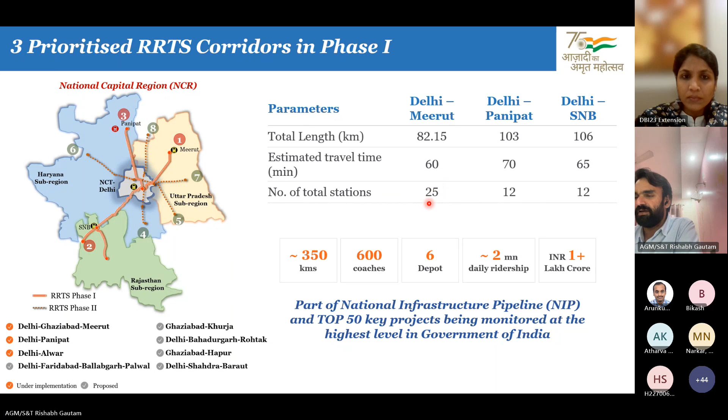The key differentiating factor of RRTS versus the metro system is that while a typical metro like Delhi Metro is designed for 80 to 90 kmph, the average speed including stoppages is approximately 35 kmph. Our RRTS system is designed for 180 kmph, with an operational speed of 160 kmph, giving us an average end-to-end speed greater than 100 kmph. This is what differentiates us.

While traveling in a metro from central Delhi to Gurgaon or central Delhi to Noida, you would spend approximately 40 to 50 minutes on that journey. In the same amount of time, you'll be able to travel from Delhi to Meerut, Delhi to Alwar, or Delhi to Panipat because of the higher speed.

Apart from that, our signaling system is interoperable, which means that the same train can run from the Delhi Meerut corridor and can also run on the Delhi SNB corridor and the Delhi Alwar corridor.

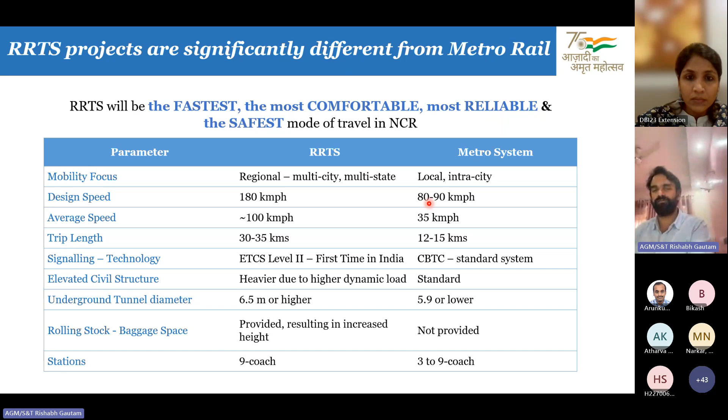But this is just a very generic overview of the RRTS project. I'll just directly dive into what we did in terms of BIM implementation.

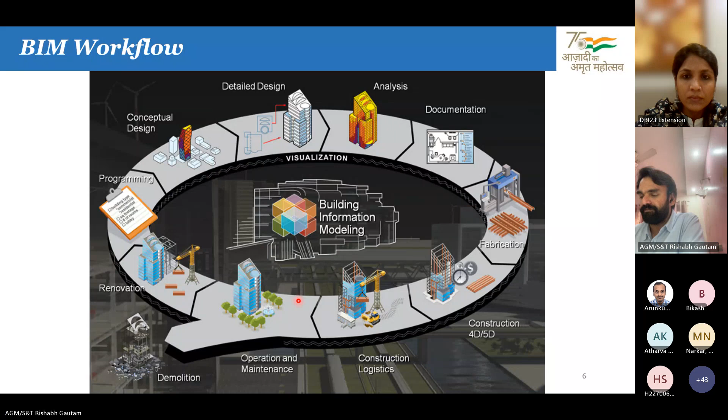So what do we mean when we say BIM implementation in NCRTC? BIM, as everyone knows, is not a dumb 3D model. It's a 3D model which has embedded metadata information in it. It's a shared information model.

In NCRTC, from the very beginning - I joined NCRTC in 2017, the company was formulated in 2016 - right from the very inception, we were very clear that we wanted to adopt BIM processes from the very beginning, and we identified what areas of BIM we wanted to focus upon.

There are various dimensions of BIM. I've not talked about those, but you have 3D, 4D, 5D, up to 7D. I'm very proud to say that we have implemented all 7 dimensions of BIM in NCRTC. So we identified what are the key aspects of BIM we want to focus on.

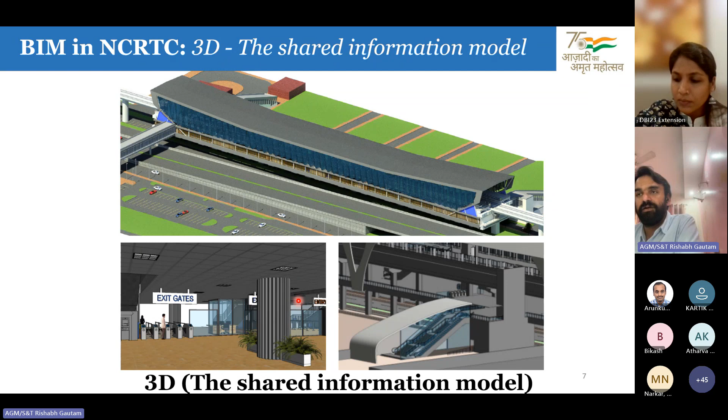I'll give you a very brief glimpse of what we have achieved and then talk about how we achieved it. So we already have all elements, including civil and systems, modeled as smart, intelligent 3D models. We have also implemented 4D BIM in NCRTC.

And that too, first we were using an industry tool called Synchro. Now we have developed this technology within our common data environment itself, so now we can visualize 4D simulations within the browser itself.

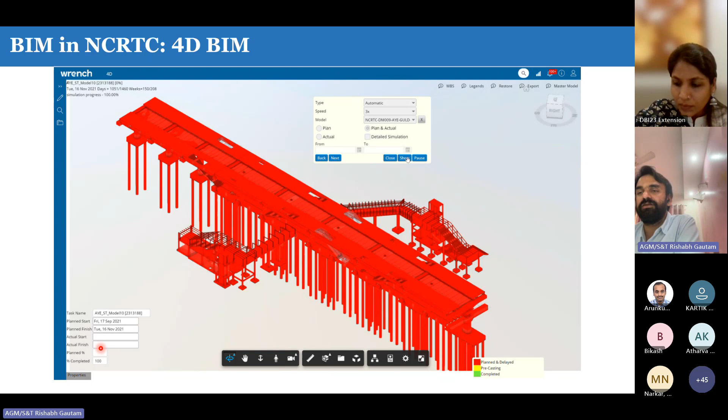So just a small video. Sorry.

So you can see, what we did was we linked all the Primavera schedules that were supplied by our contractors with a 3D model, as we are all aware of how 4D BIM works. And now we are able to visualize the construction sequence, how it would take place.

Now, typically how 4D BIM helps us is in a typical Primavera schedule when it is submitted, it is very difficult to find out what the problems are, if there are any inaccuracies. But when it is represented as a 3D model, when it's linked with all the 3D models, we can actually visualize the construction sequence and identify faults very easily.

So if somebody is casting a slab well before the columns are erected, we'll be able to visually identify it and tell them. So from a very layman perspective, people who do not have much experience with using Primavera will be able to visualize what construction sequencing has been submitted and whether it is as per our target dates and key dates given to the contractor.

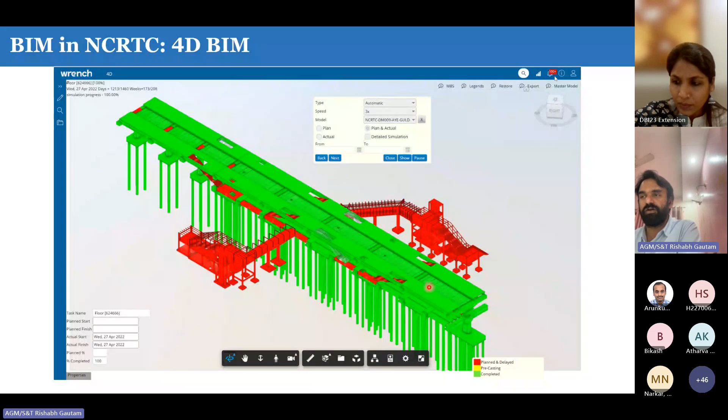We have also implemented 5D BIM in NCRTC, wherein we are able to do quantity takeoffs and derive costs right from the BIM model in the project.

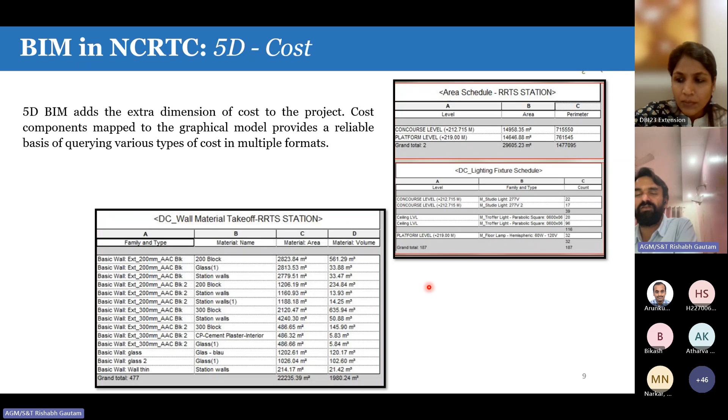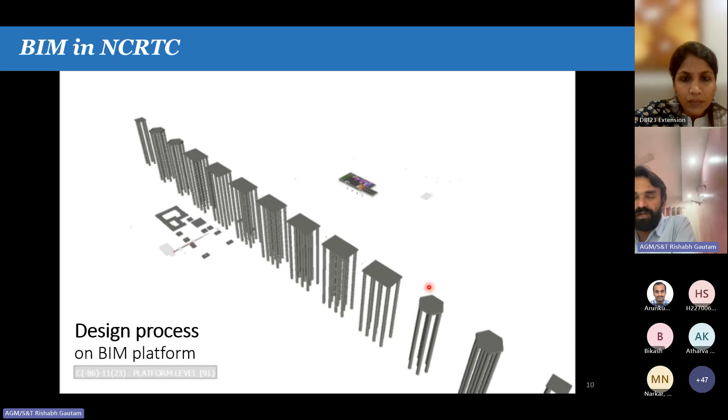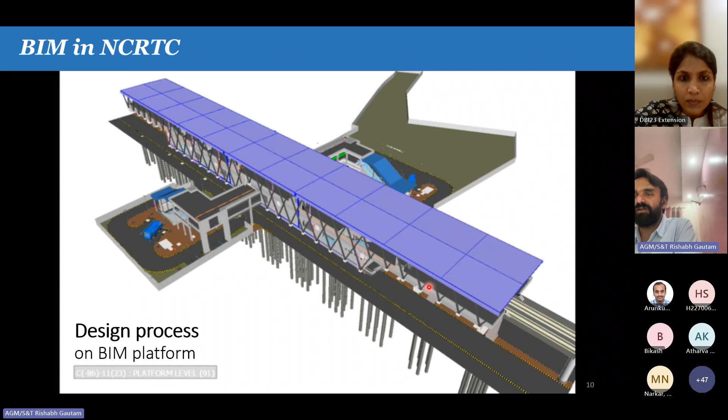Another key advantage of being early adopters of BIM in NCRTC was, when the project was initially launched in 2019, soon after that in 2020 March, COVID struck the world, and everyone was actually confined to their homes. But since NCRTC was on the BIM platform and we had a very robust common data environment, we were able to work from home. Majority of our teams were able to work from home.

Only the very essential people were required at site. The rest were working from home on the cloud, and we were able to approve all designs in time. So we can say that the impact of COVID on this project was very negligible.

So what you see here is our Sahibabad station, which was completely designed and approved during the COVID period, even before the construction began.

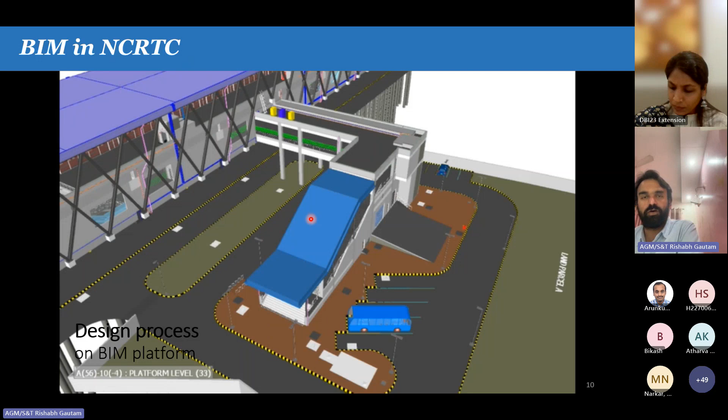And because of this level of detailing that we were able to do and its integration with our GIS platform, we were able to accurately identify which utilities needed to be shifted, electrical utilities or gas utilities. So we were able to align our tasks more accurately. We were able to optimize our costs in a more appropriate way because of adopting BIM processes from the very beginning of the project.

Right from the inception stage, we were clear that we wanted to adopt BIM processes, which meant there would be no 2D drafting in our project. From the concept design stage, every station, every drawing is a 3D model, and all drawings are extracted from the BIM model and issued to the contractor for execution. From the very basic concept notes to the good for construction drawings, everything is extracted automatically from our BIM models in NCRTC.

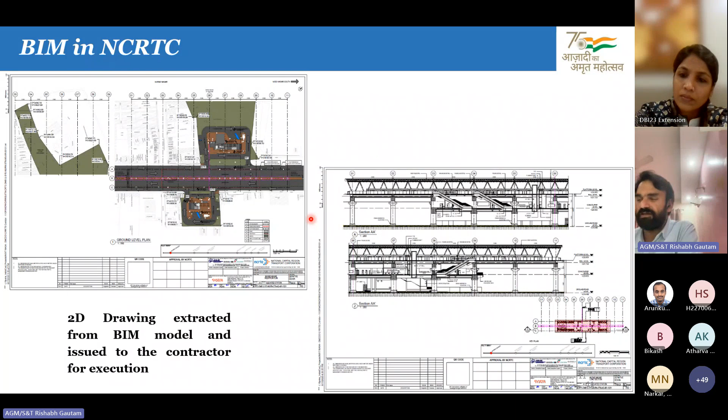This slide shows the GFC extraction. All the scheduled quantities are also extracted automatically from the BIM model. This is how we typically submit our drawings - a cross section, a 3D view, a long section, cross sections, everything.

Since everything is available as a single source of truth on a common data environment, if there's any change in the drawing, it is automatically notified to all the designated stakeholders, and they're able to update their drawing database as well. Another unique feature we've implemented in NCRTC is a QR code at the bottom of every drawing.

What that enables is once the drawing is printed and people at site are working using that drawing, they can just scan the QR code and the app tells them if this is the latest version of the drawing they're working on or not. Hence we can avoid any discrepancies or problems at site later on. So people at site are always aware if there's a newer version available.

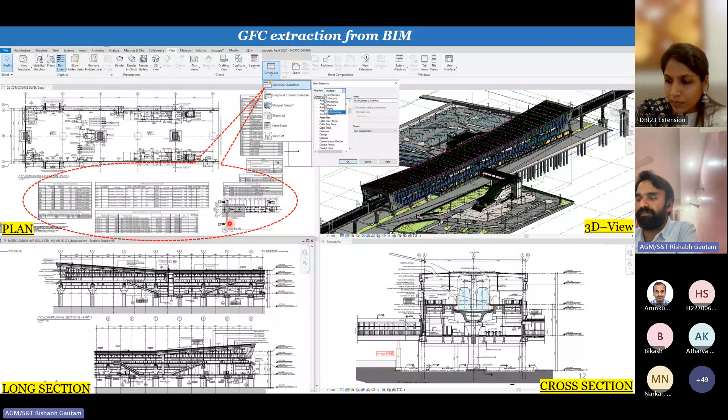Just another slide to show how bill of quantities are extracted from the BIM model.

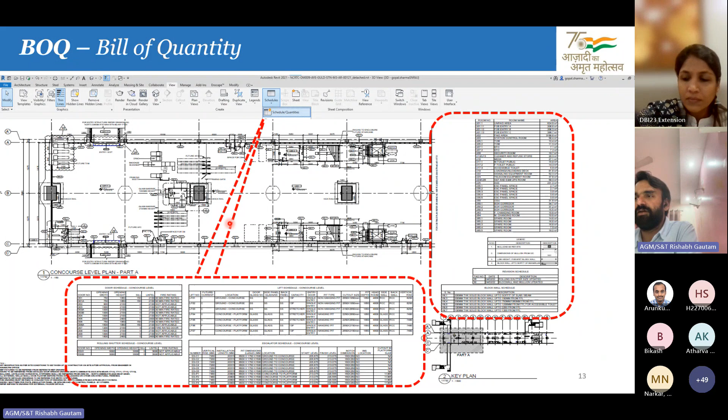Now, the tool used for BIM implementation is not important, but it is important to have uniformity across the project. So while we began this project, we identified a few software that we wanted all our contractors to work on. But we also mandated that all BIM models will be shared in IFC format as well, apart from the proprietary format.

All BIM models are also shared in IFC format, and our common data environment is able to read these IFC files, so that most people who just need to visualize these models and do commenting and annotation on them can do it without the use of those proprietary costly tools.

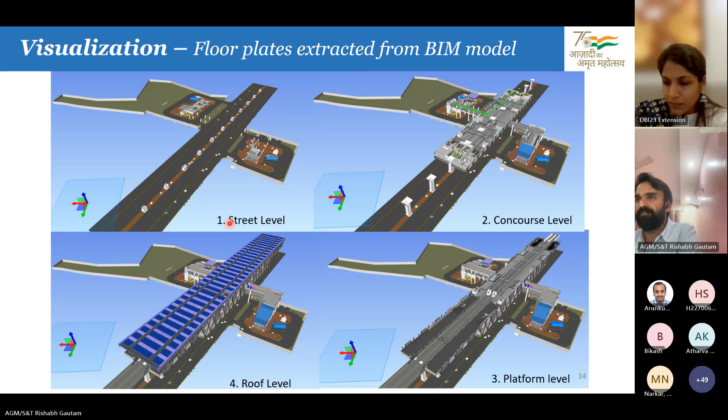Coordination of different services is very easy on BIM, and we were able to extract the advantages of that during the design phase before the actual construction began. We were able to identify a lot of clashes that could have happened at site and avoid them.

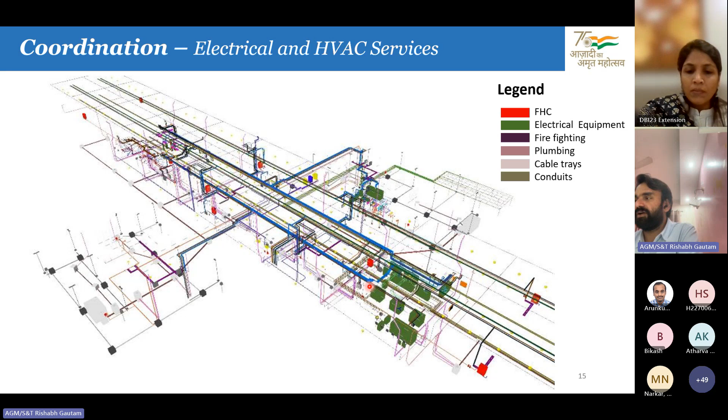This is the level of detailing we were able to achieve well before construction began. You can see every small minute detail - the track slab, the trains, the platform screen doors, the electrical booms, all lighting structures - everything was modeled in depth before the actual construction began.

All system contractors and designers were updating the same original source file, and they were able to coordinate remotely also to make these drawings successful and accurate before the construction began.

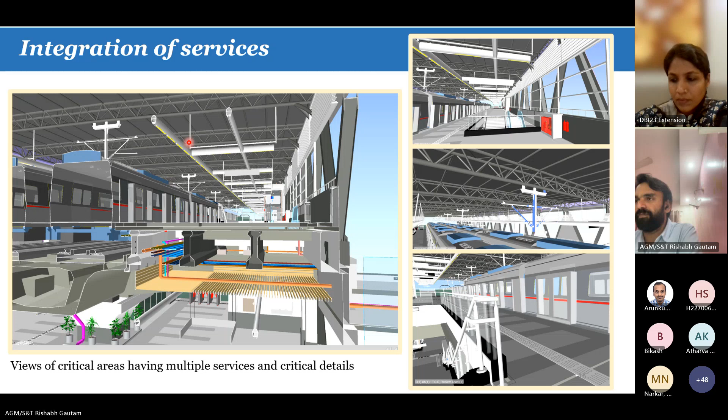This is an example of how we were able to identify a few clashes at site, how the cable trays were going into beams, how the track slab and the beam stacks were colliding. Just a few examples of these that we've tried to capture here.

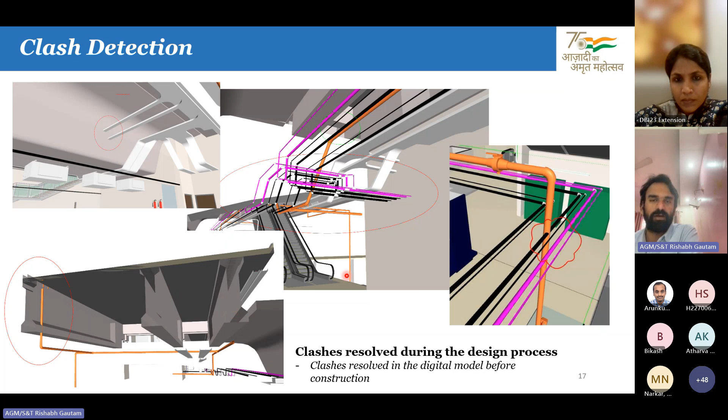Finally, I'm going to talk about asset management, which plays a very important role. What we like to tell time and time again during presentations is that specifically for NCRTC, this is approximately a $5 billion project. And the construction phase of the project is only a couple of years, from 4 to 6 years - that's the construction phase of the project.

BIM has a lot of advantages during the construction phase of the project. We can save a lot of time. We can also do a lot of cost savings during the construction phase using BIM processes. We can save on a lot of design changes which come on later.

But the majority of the rich information that we are able to capture during the construction phase of the project, we intended to use that for the asset maintenance phase as well. So the construction phase of the project is only for 4 to 6 years, but the asset has to be maintained for the next 50, 60 years. How do we utilize all that rich information that we have captured during the construction phase of the project during the asset maintenance? And that's what the seventh dimension of BIM focuses on.

That's the 7D. So early on in the project, we decided that all this information has to be transmitted to our AMS system, whatever AMS system we finally decide upon. And then we wanted to pass all this information, all this asset information, to our operator. Now the government has started pushing for private operators.

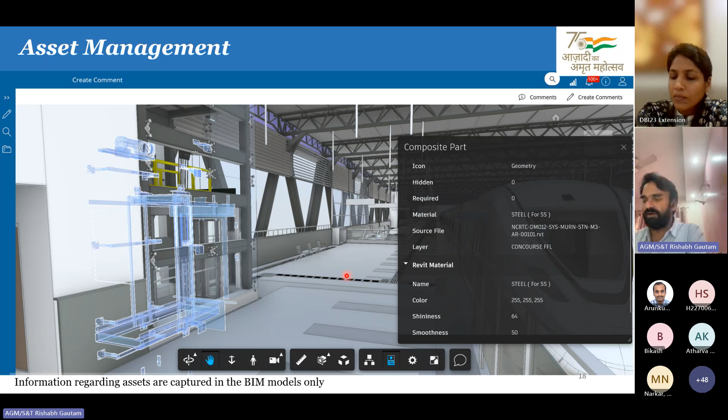If they are able to utilize IoT sensors and these digital twin models to accurately identify the faults in the system and help make the operator's life easier, that's a very small investment during the construction phase of the project, which gives huge benefits during the asset maintenance phase. So that's about the different dimensions of BIM and how we have implemented that in NCRTC.

So I wanted to give a brief overview of what we have already achieved, so that it becomes more relevant to understand. Yes, we are not just talking hypothetical here in NCRTC. We have already achieved a lot, and we are constantly evolving and learning from what we have implemented, but also how we intend to take it forward. So I'll just talk about the current status of BIM in NCRTC. As I've been saying throughout the presentation, we have already adopted BIM from the very beginning of the project.

Now, early on, back in 2018 and 19, a lot of DDCs and contractors came to us and said that we are aiming too high. The industry is not mature enough for this level of adoption. That what we expect out of BIM might lead to failure, and that the industry in 2018 or 19 is probably not ready. So we started analyzing different BIM implementations across India.

So we visited a couple of projects which were adopting BIM, and we learned from their mistakes. We saw what was good in those projects and probably what would not work best in NCRTC. And those learnings actually helped us understand this implementation of BIM works, and this format of implementation is probably not suitable for NCRTC.

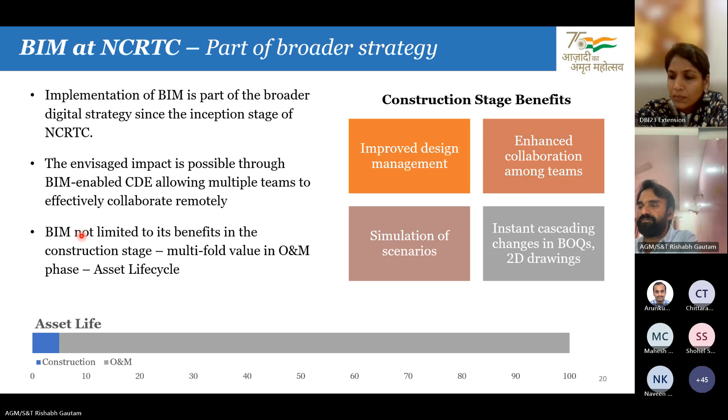So in order to make BIM implementation successful and to avoid the mistakes other projects were making, we understood that BIM has to be a company-wide initiative. There cannot be a specific team which focuses on BIM implementation in NCRTC. That way of implementation will only alienate and isolate those people, because most of the people will keep on avoiding responsibilities. So what we did was we identified BIM champions from each and every vertical in the organization.

And very early on in the project in 2018, we started training those BIM champions on BIM processes and BIM tools. And then it was the responsibility of these BIM champions within the organization to spread the message and knowledge of BIM in their respective teams. So we took a handful of people from track, from civil, from signaling, from electrical, from escalator, lifts, all departments.

We took people, we trained them on BIM, and it was their responsibility to get their teams working with them to also adopt BIM. That way, nobody was able to say that BIM is this person's responsibility or BIM is that department's responsibility. BIM is a common initiative across NCRTC, and we all take ownership of a successful BIM implementation in NCRTC. The second point for a successful BIM adoption was procuring a very robust and powerful common data environment and providing free access to everyone.

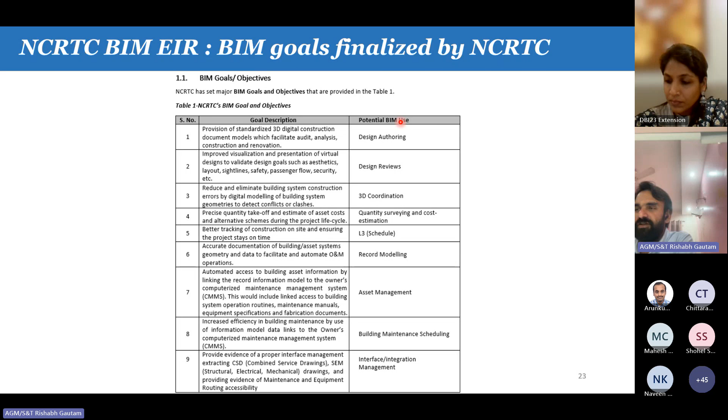This is a screenshot of our BIM goals and objectives that we captured in our EIR. So what I've talked in theory, I'm just showing you a snapshot of what it actually was. So what was the use, who was responsible for doing that activity? Everything was captured here. So everyone, when they read this document, they knew what they're supposed to do during the concept design stage, the preliminary design stage, right to handover and operations, what were the different objectives that needed to be achieved by a BIM model, what level of maturity they needed to take this model up to.

So by reading these documents, our DDC, detailed design consultants, were aware of what was expected out of them. Our contractors were aware of how they were supposed to update the model once it was handed over by the DDCs, and what level of maturity they needed to take it up to.

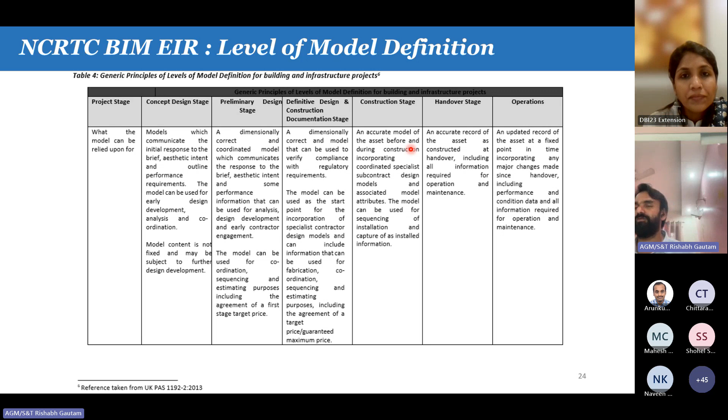Again, some other contract clauses like training, we made it very clear. Some of the contractors or consultants try to say, who will train these employees? The fact is, most of the Western countries, when they start implementing BIM projects, half the work is outsourced to India. So we made it very evident and clear: NCRTC is not responsible for providing training with regards to any BIM-based software application being used by the consultants or contractors for the supply chain. It's a requirement that the individual parties are fully trained on BIM tools prior to project commencement.

So we identified the excuses we expected these companies to make. So you have to think from our perspective. We are the clients. We are the infrastructure managers. It's our responsibility to make this project successful. And we had to identify potential roadblocks and nip them in the bud before they actually blossomed into a full-blown argument.

And then we also mandated that we'll be providing them a common data environment free of cost, but they have to mandatorily adopt our common data environment. They cannot say that I'm not comfortable working on this CDE, I will bring my own CDE. That was not allowed.

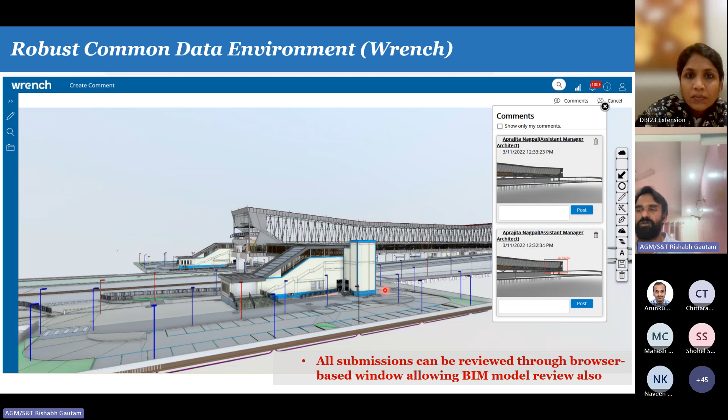So I think this is a small video. So yeah, this is a screenshot of the browser and how on the browser we are able to load a full 1.5 GB 3D model, browse through it, and navigate through it on the browser itself without using any of those costly, heavy authoring tools or a high-end workstation. I think that this is the video.

Yeah. So this is a typical workflow of how we use this browser-based common data environment, which in our case is Wrench, which is a Make in India software. And we have not accelerated this video at any stage. This is typically how the model, once you click on it, opens and loads, and how you are able to browse through it.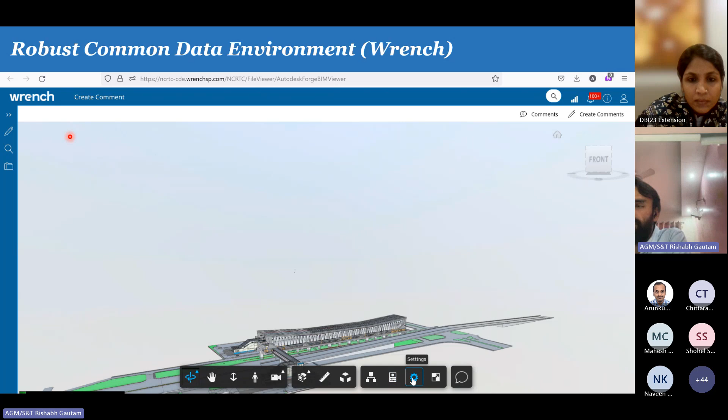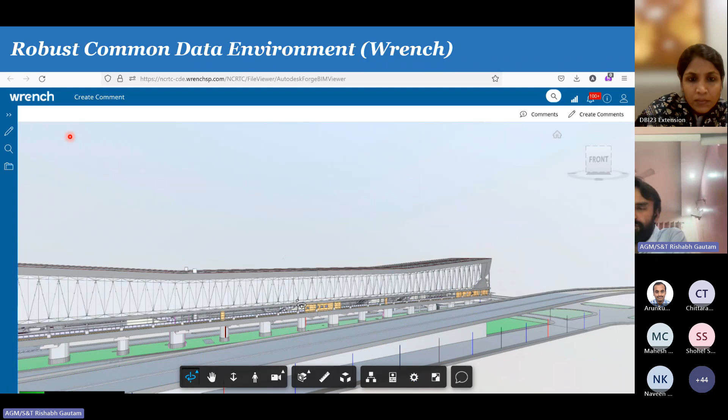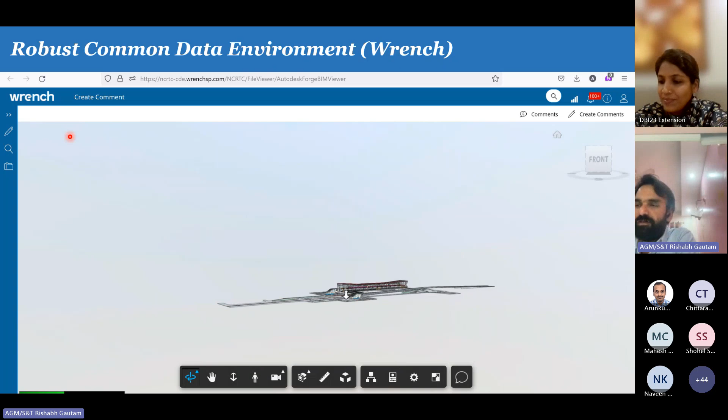So we are just giving you this small demo just to drive home this point that the technology is not a limiting factor right now. So if anyone says that the technology is not mature enough to do BIM implementation on a large infrastructure project of this scale, you can see it right now. It's all being done on a browser.

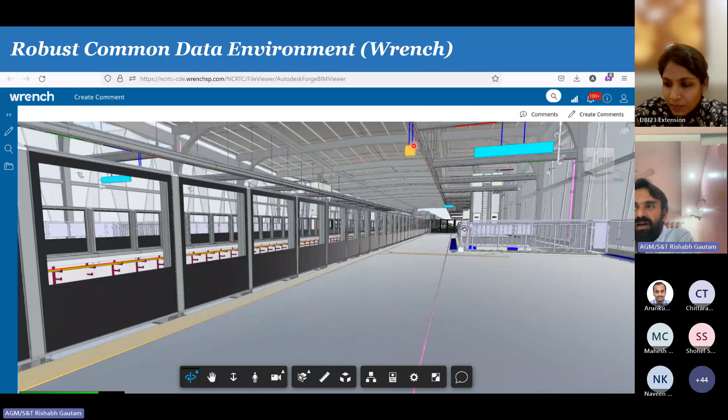And all system contractors, the platform screen doors are loaded, the CCTV cameras are loaded. Every element is loaded by individual contractors on the original file created by the DDC. So everyone is collaboratively working on the same 3D file and updating their part of it. Everyone takes care of their part. They coordinate the model together.

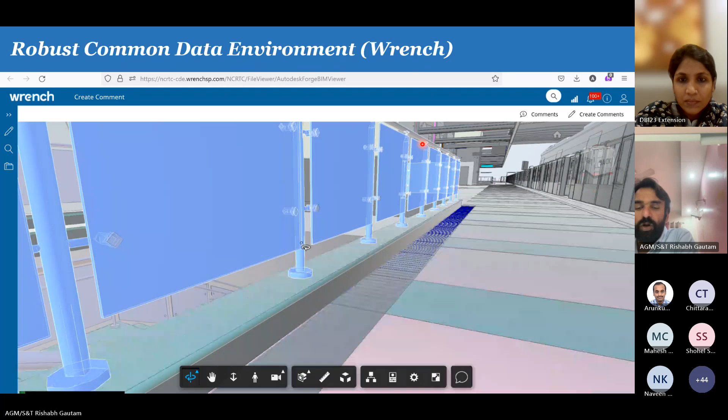If there are any problems, we have BIM model coordinators who assist people. So their job is only to help them identify if their team is running across the problem. We have a few people who are trained on that, but we do not take the ownership of aligning the two models or joining the two models or federating the BIM models together. We don't do that.

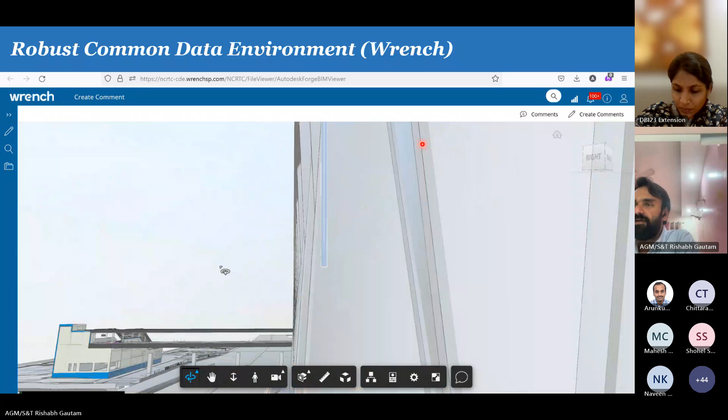So again, just to help you appreciate the level of detailing that went into the models and the level of maturity that we have achieved with the BIM models. I'll just skip this part now.

Another key factor for successful BIM implementation is the timely onboarding of the AMS and O&M contractor. See, when the operator is onboarded, he comes with his own set of understanding of this is the information which is vital to me. Right? This is information which I require. We, being a project team, probably have a different mindset, and you require the operator's mindset to understand. Probably I am passing on to him 50 parameters, right? But he required something different. His requirement of 25 parameters is not captured in the 50 parameters that I'm passing on to him.

So when he is onboarded on time, if he's onboarded before the ROD, he can actually tell the contractor team, the system contractors and the civil contractors, maybe modify your COBie file in certain format, maybe try and add all this information before you pass it on to me. And this was done and actually made our life easier, because since both were able to jointly agree upon the information exchange, we did not find any infighting that I am not getting sufficient information or sufficient information is not being passed on to me. So that really helps make this BIM implementation project successful.

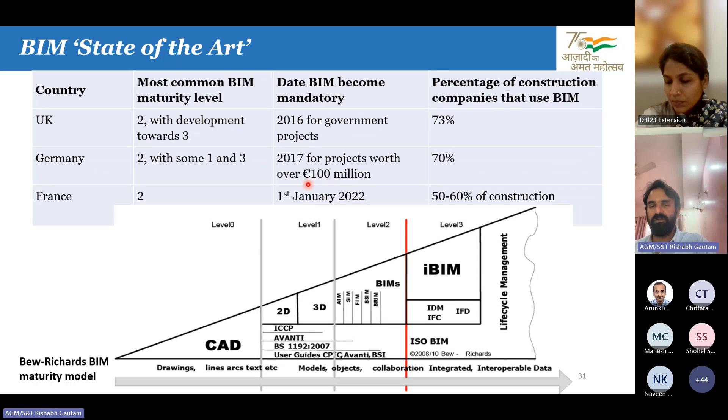Billions of dollars are being spent by the government, right? And there should be a central repository of all this data with the government or with a central agency so that they can take more informed decisions, that upper management or ministerial level management can actually take those informed decisions based on this kind of data.

Now, having talked about BIM implementation in NCRTC, I would like to shift focus from just BIM implementation and talk about something more advanced.

So since we were adopting BIM right from the inception stage, and everyone was providing us with all these rich 3D models and all this metadata along with it, we identified a couple of other avenues that we wanted to focus upon, namely augmented reality, virtual reality, and 3D printing. And we wanted to see how we can actually utilize these technologies for making our life easier during the construction phase of the project, as well as during the asset maintenance phase of the project.

Right. So if I start taking BIM as a baseline, what else can I achieve? What we feel is that the industry should not focus upon how BIM will be implemented, or if BIM implementation will be successful or not. We should take BIM for granted now. The industry is mature enough, provided we do the hard work at the right time, during the initial stage of the project. BIM can be made successful, and then what else can we achieve from the information that we have captured? So we created a pyramid, which is a center for excellence in NCRTC.

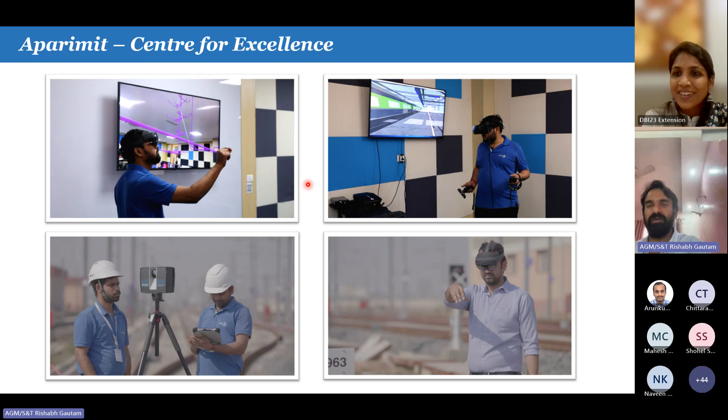And please let me know if I'm running over the time. I think it's already 10:55. I'll just quickly try and summarize all this. No problem, sir. You can take a few more minutes, sure.

Okay. So I'll just play this video. This is how we utilize augmented reality for on-site visualizations here. So we are wearing an augmented reality headset called HoloLens 2. This can be done on your phone or tablet as well. So this is our Sahibabad Guldar station during construction.

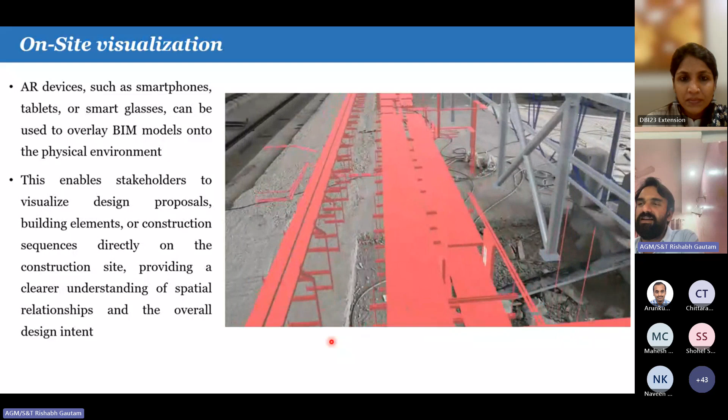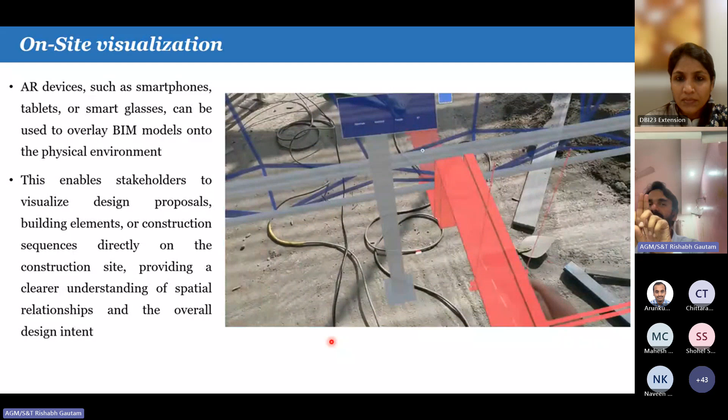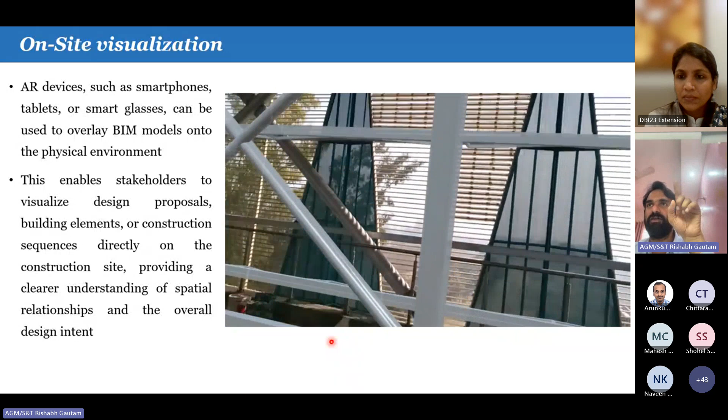Now we can actually load in information layer by layer and see if all this work is being done as per drawings or not. So I can use this for on-site visualization as well as checking if the work is as per my requirement or not. If the drawing mandated two cutouts, have two cutouts been provided or not? If there were three ACs to be provided in the room, just by visualizing, I can see these are the locations where three AC ducts were to be provided, but probably the contractor has just given me two. I can do on-site visualization and as-built validation.

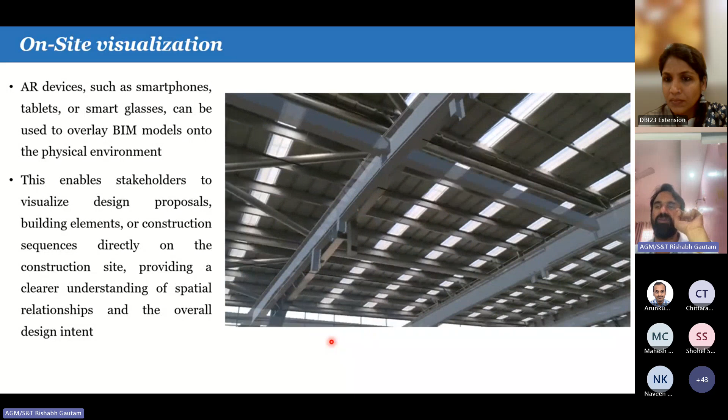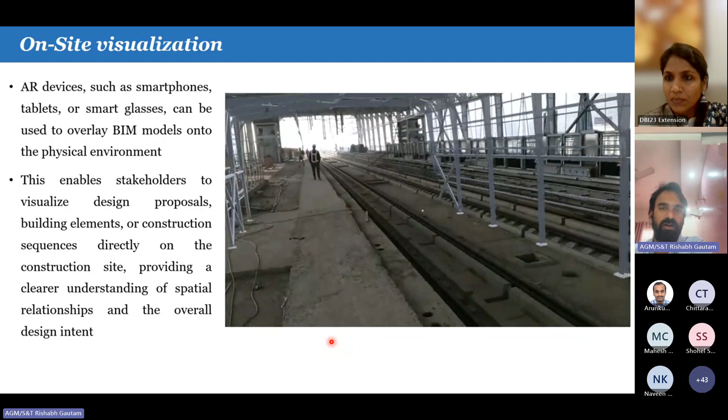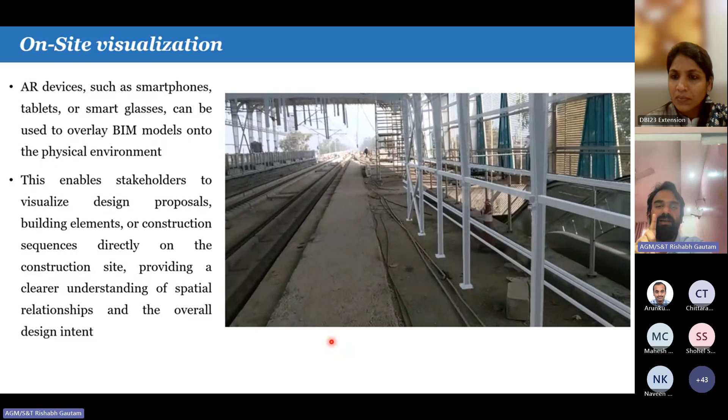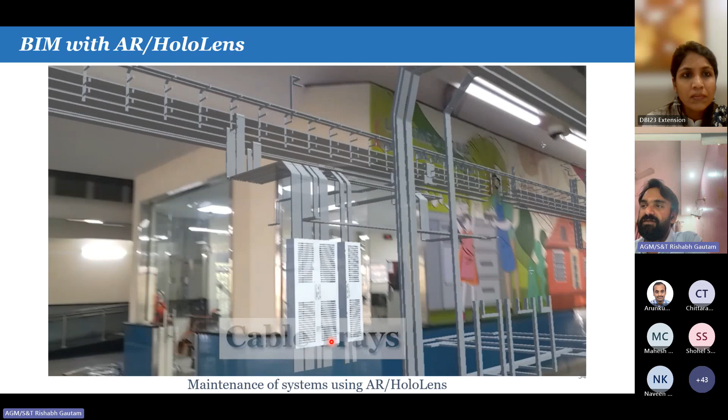So what you are visualizing here right now is how many columns are supposed to be erected, where the cable trays are supposed to be, where the cable runners are supposed to run. All that can be visualized and then cross-checked at site. So I can visualize things before they are constructed, and once they're constructed, I can visually verify if it is as per the drawing or not. As an example, once the platform was created and the station was ready, the contractor was supposed to give us 6 or 7 cable trays. I can now visualize if those cable trays have been provided or not.

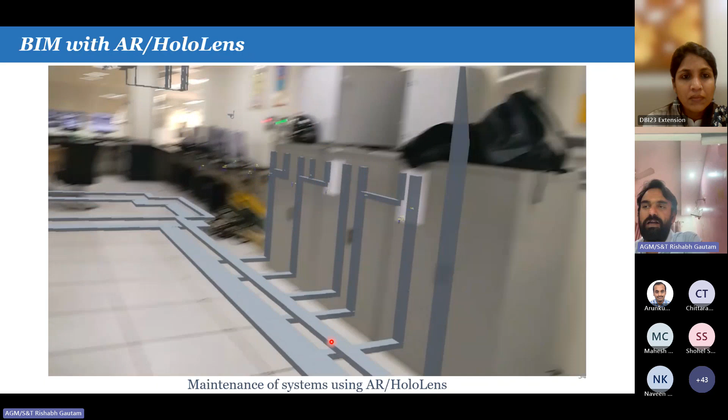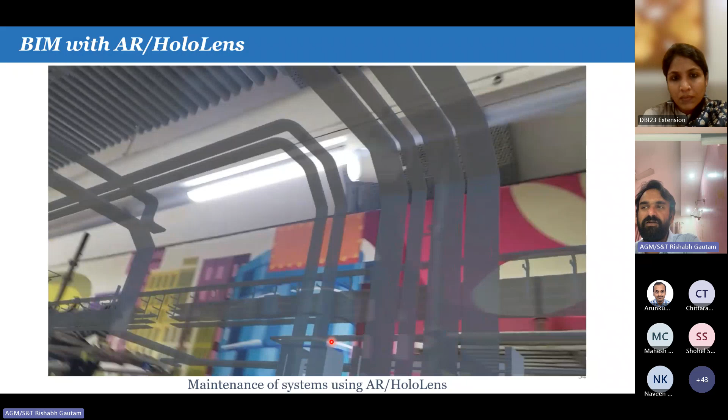Now I can actually visualize services which are hidden above the false ceiling or beneath the false floor as well. Now you can imagine how we can use this information for targeted maintenance instead of removing every tile to find where the cable tray was, or going through a manual 2D drawing. I can just wear a headset and identify where the cable trays are running. From these 10 cable trays, I can just say, show me the signaling cable tray, and follow it. So I can correctly identify the route.

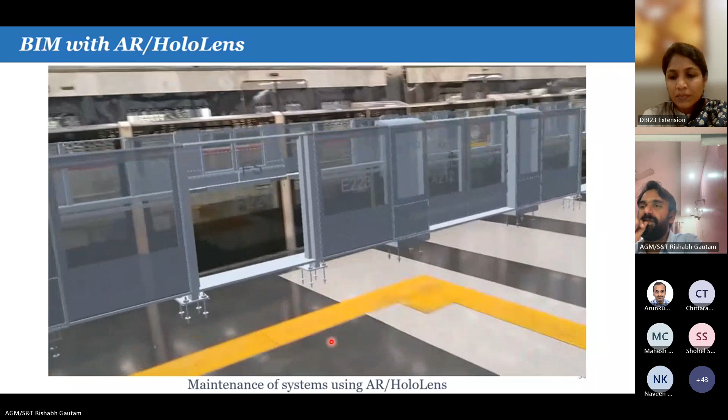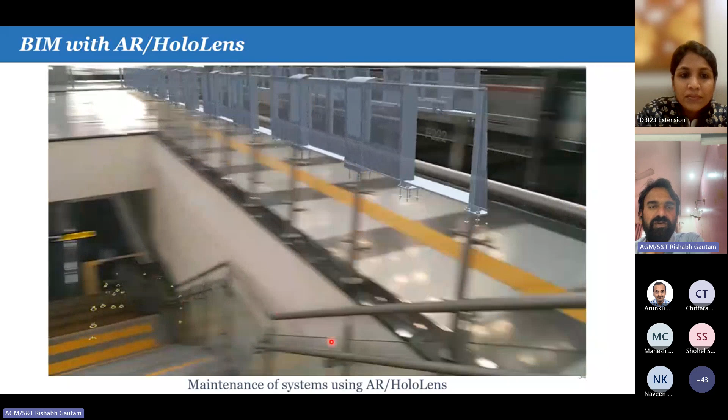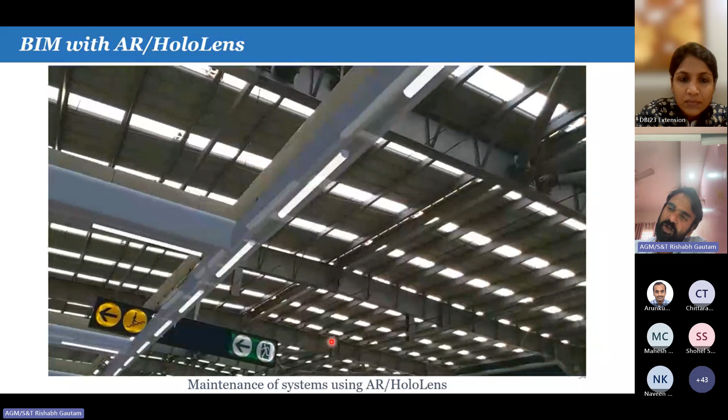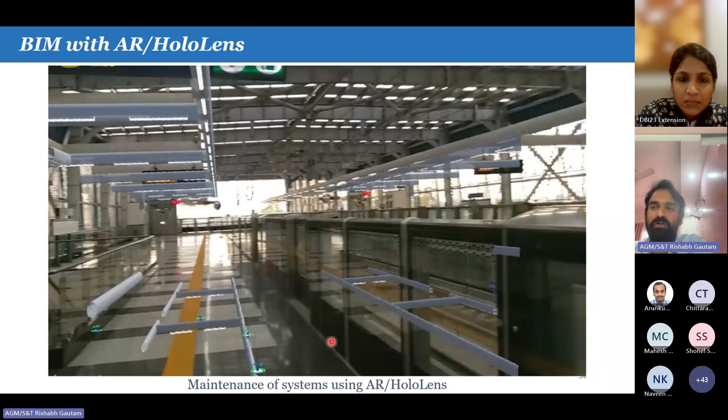This is the platform screen doors, and we can see if all the doors are correctly aligned as per the drawing or not. Just a very, very simple visual check. So these are different layers that we can just select. Now we are just checking lighting. You can see even the tube lights are aligned. And whatever little offset you see right now, it's a parallax error while recording from the headset. When the person is actually wearing the headset or using the phone, they don't see this inaccuracy, which is there in the recorded video due to the parallax error.

So again, I'll just skip. How do we use all this information from system contractors that we have captured for maintenance? So this is a small maintenance demo that we built for an IRS point machine.

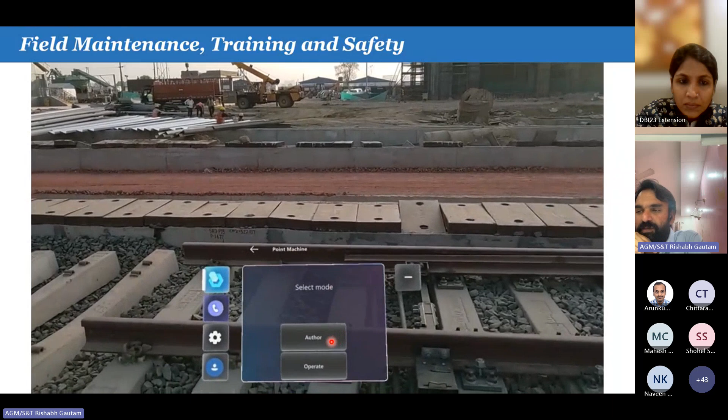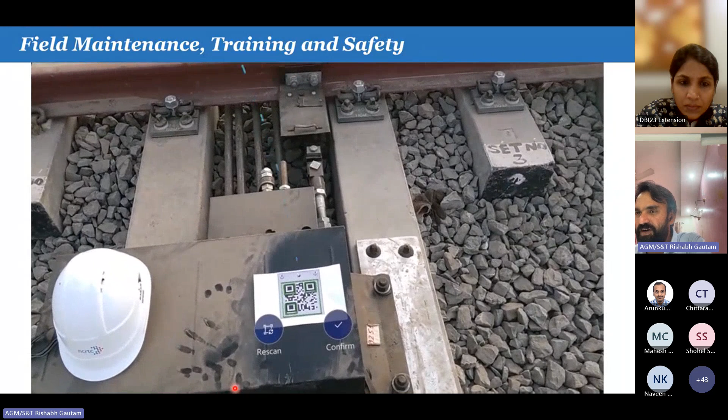And I'm just feeling the pinch here because I can't see that manual scroll button. Otherwise, I'll just forward it to the good portions of the video. Just give me 1 second. Yeah, I can see it now. This is the very important part that I like to show whenever we give this demo. Yeah.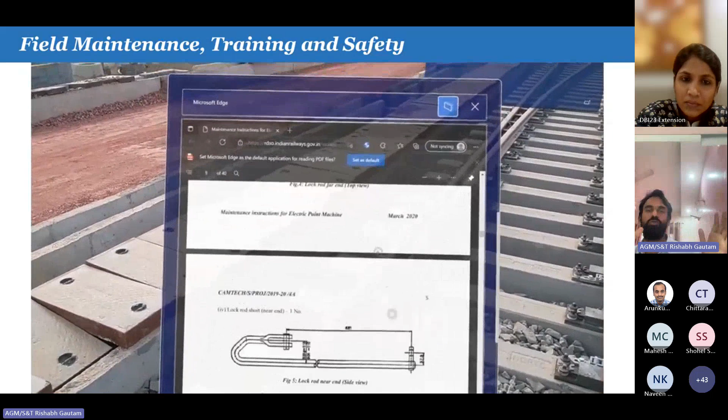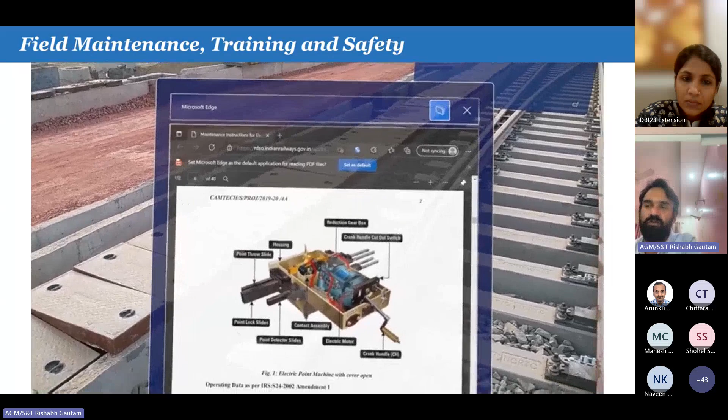Imagine doing maintenance. Since you have already captured all the asset maintenance manuals on the headset, we can download them by scanning the QR code to know which asset we're talking about. I can download its maintenance manual in real time while doing maintenance. Since all this information was captured in my BIM model and passed through COBie into my AMS system, now I can scan the QR code, get its information, and continue doing maintenance. If I forgot a few steps or the sequence I need to follow, these tools can enable it.

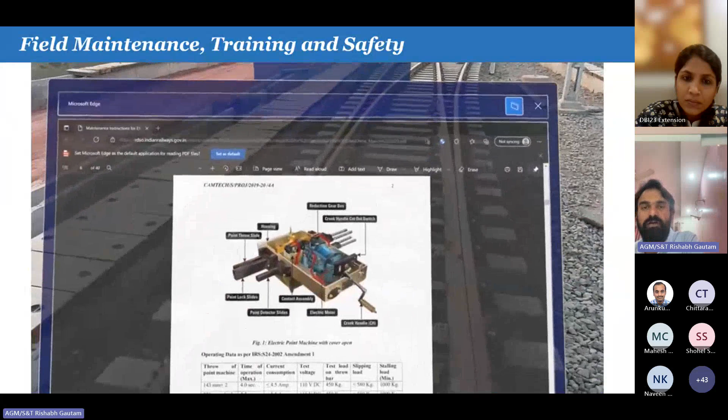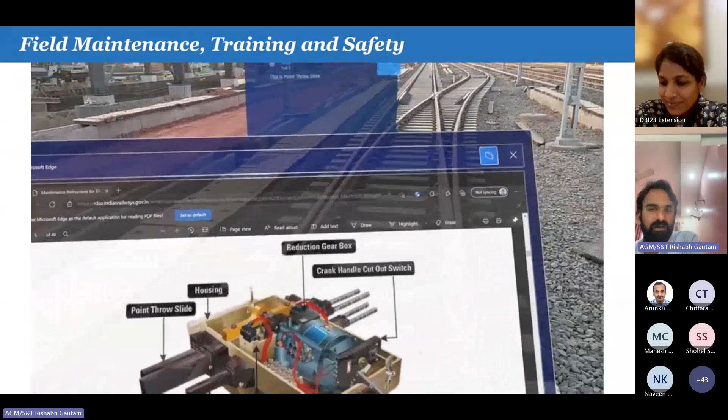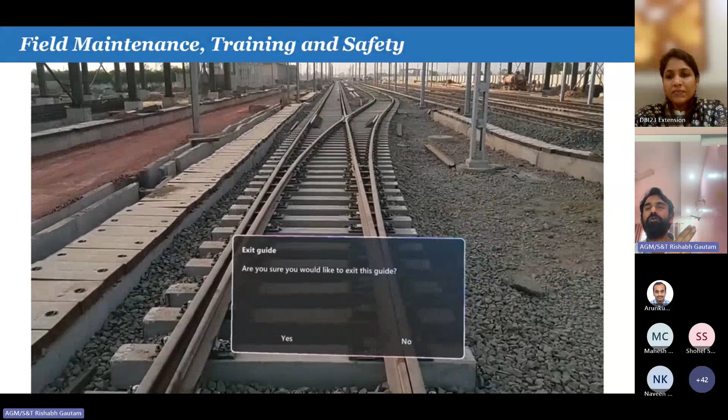What we're trying to showcase here is that the technology is mature enough now. Probably in a couple of years it will percolate to the level where, if you imagine in the 1990s there was the Nokia phone, which was very costly and only a select few had it, now everyone has an Android phone or an iPhone. Maybe in a couple of years everyone will have these AR devices. Now, if the organization hasn't captured all this information in 3D by adopting BIM, they would not be able to utilize this technology which is available. If you're able to correctly identify the use cases and start capturing information in 3D, adopting the BIM process from the very beginning, these are the use cases we can actually end up implementing in the future.

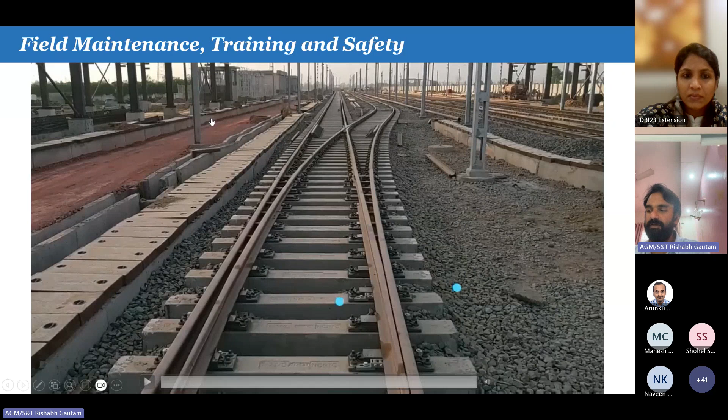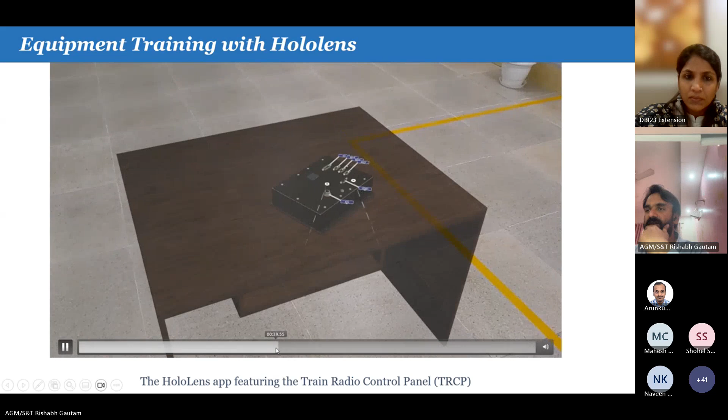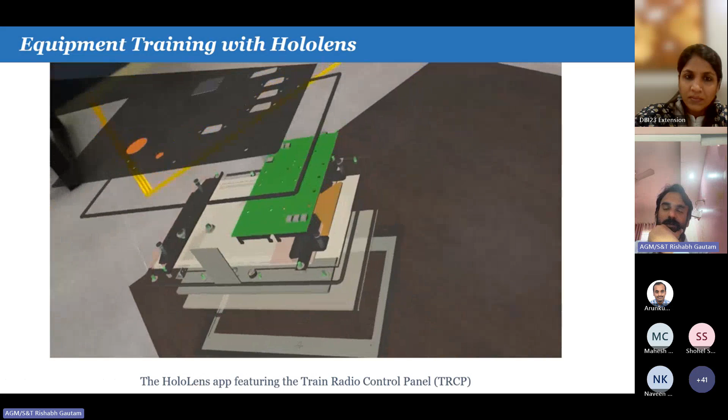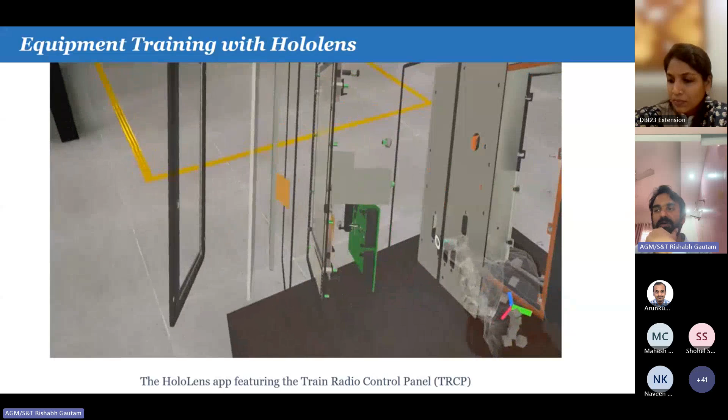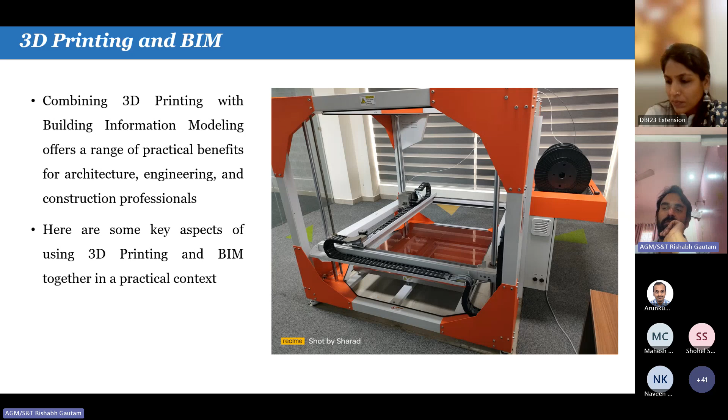3D printing was another low-hanging fruit. Since we already had the 3D models available, getting a good industry 3D printer, we were able to create miniature models of our viaduct, our columns, our stations using the 3D printer. And since it's a very large volume 3D printer of 1 cubic meter, we can actually replace plastic components which break down by 3D printing them and replacing them at site.

I'd like to take a moment to show you something. Just one second.

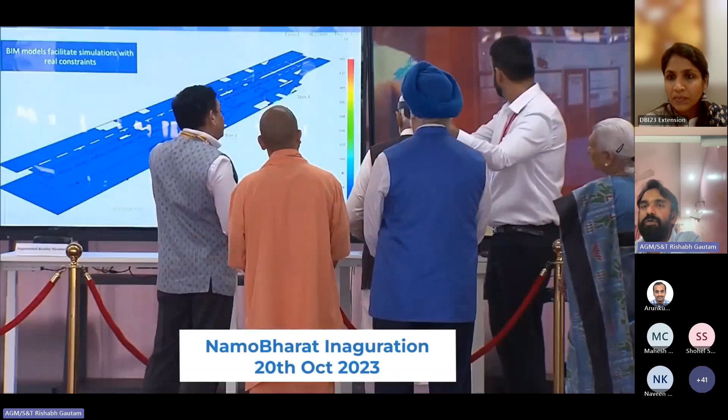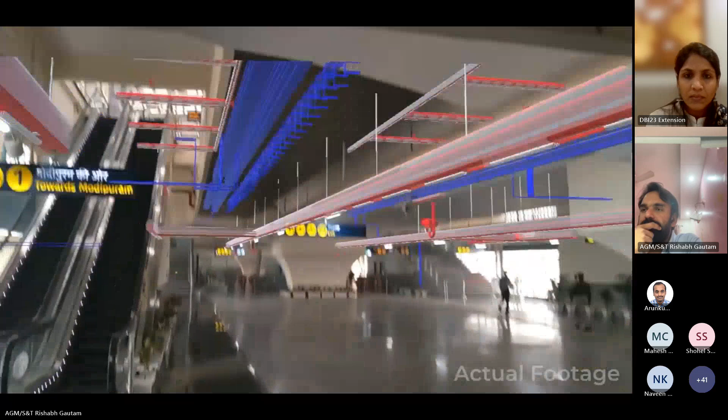So this shows how maintenance teams can actually use this information during an actual live project.

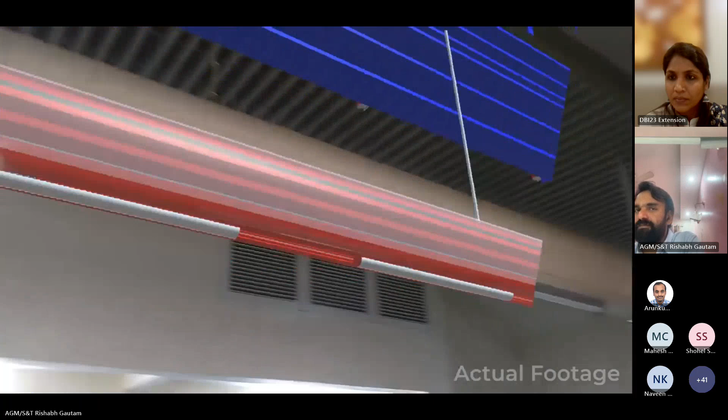Again, I'll skip this now. So I'm open to any questions. I'll stop presenting. I hope this was of some use to everyone attending.

Absolutely, absolutely, thank you Mr. Rishabh. Technology is no longer a limitation, we're mature enough to take this forward in a very interesting way. Mr. Rishabh, thank you for giving such a crisp overview of BIM implementation in the NCRTC project. I think it clearly showcases that the team at NCRTC has pushed and continues to push boundaries of innovation and build the smart infrastructure India envisions and needs. This will surely help future infrastructure projects, and I think NCRTC has curated a path for many others.